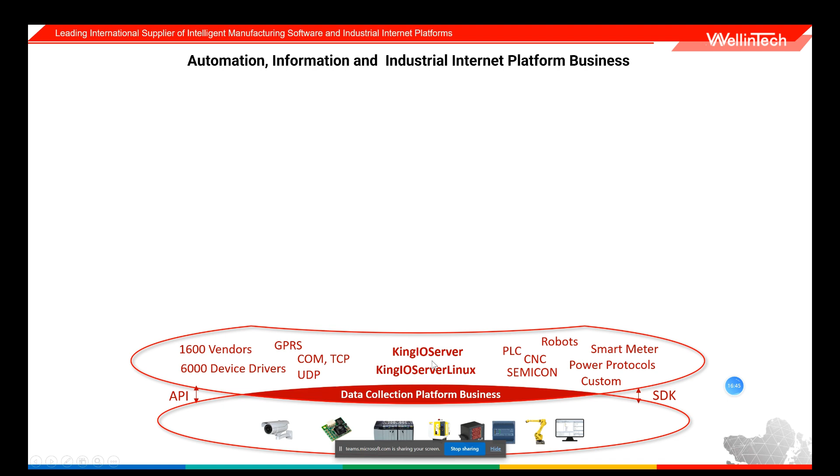In terms of vendors, we support famous names such as Siemens, ABB, Rockwell, and Kyland. In total, we have around 1,600 manufacturers supported by this platform, in order to build comprehensive data collection on the shop floor.

On the top floor, we have what we call the monitoring platform, where the SCADA and large historian databases reside. We have a number of platforms here, and the main one is KingSCADA, which will be today's focus. There's also King Historian, a huge database to tackle large amounts of big data—an industrial database, different from SQL Server and other databases.

Then we have King SPC for statistical process control, and King Super SCADA, which is more based on Linux, built for information security projects rather than traditional SCADA software. We also have KingView, which is basically a machine-level SCADA software like an HMI, if you need a low-cost SCADA solution.

So we have a number of monitoring systems designed to be market-specific, meeting growing market demands and technological complexity in terms of communications, protocols, and new vendors entering the market. We continuously adjust and improve these systems in terms of comprehensive data collection and features, so we can use this platform to build, for example, KingSCADA, especially once we have a comprehensive data collection system on the shop floor.

We can build equipment monitoring systems: centralized monitoring, plant level monitoring, remote monitoring. These are the monitoring systems that we can build using KingSCADA. Today's focus will be on this system.

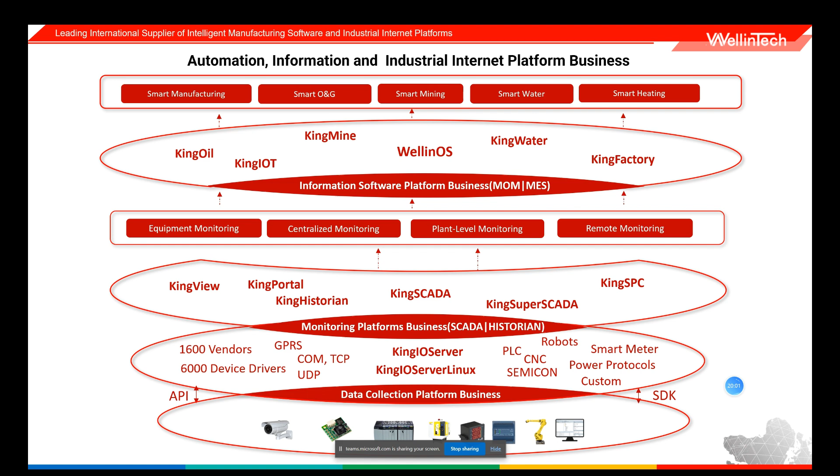If some of you here are maybe from Siemens, Schneider, or Rockwell, if you put them in parallel with these other vendors, the platforms we have, for example for data collection, most of them in Europe may be familiar with Kepware or Matrikon. These are now part of PTC, I think Kepware is part of PTC. Then on top, for example, iFix uses Kepware on the backend, but it's an OEM actually. GE's iFix doesn't have its own data collection system, they use the data collection system from Kepware PTC.

If you look at these systems in the core competitive advantage landscape, we have uniform, homogeneous systems here. For example, we have King IO Server, our own platform. We can easily integrate it with systems like KingSCADA, KingView, or King Historian. Here, basically, we have homogeneous interfaces, meaning from the shop floor to the top floor, we have our own systems that can integrate a whole enterprise using only Wellintech systems. Of course, it also has the capability to integrate with all these third-party systems.

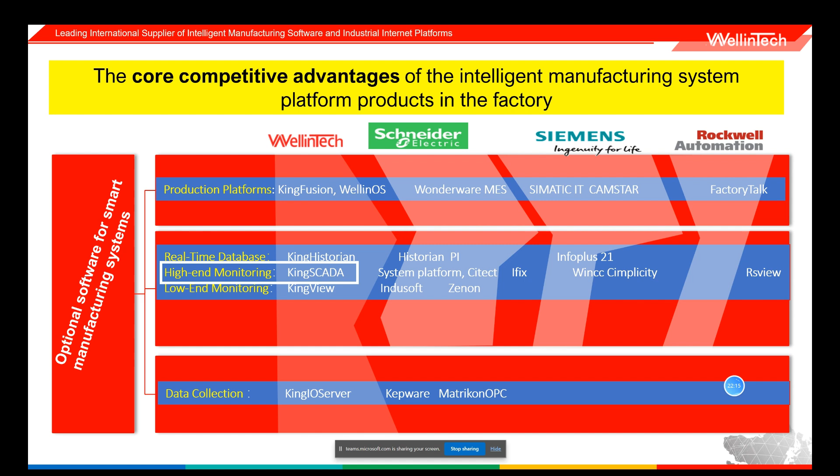The meaning here is that in any enterprise or factory, if you have vendors from one company, and that company can integrate all your systems from the shop floor to the enterprise level, it has a different advantage. But if you're going through a lot of systems, one vendor on the top floor, another one elsewhere, that means you need different kinds of skills and engineers. And if there are technical issues, you need to connect with all these companies for them to fix the issues. So there is a huge competitive advantage Wellintech offers in terms of integrating the whole factory, making a final product that is a digital factory or smart factory.

Moving on, today's focus is basically on KingSCADA, which is a SCADA system. This SCADA system is a Windows-based SCADA platform, it doesn't have any Linux version, and it can support installations mainly on the Windows platform, and it can also support virtual machines. If you have virtual machines, you may want to install it locally, or you can install it on the cloud. You can deploy virtual machines and install KingSCADA, and it will run normally, doing all the things we can do locally - we can also do it in the cloud. So this is a Windows system.

On the topic of KingSCADA, today I have 5 agenda items, and I will try to explain briefly the significance of the role that SCADA plays in the industrial automation landscape, and the top functions we have inside KingSCADA, along with some key features. I will explore this and show you a demo project. We will talk about system architecture, because that's a very important part of SCADA, then I'll explain briefly about licensing, and we'll have some questions.

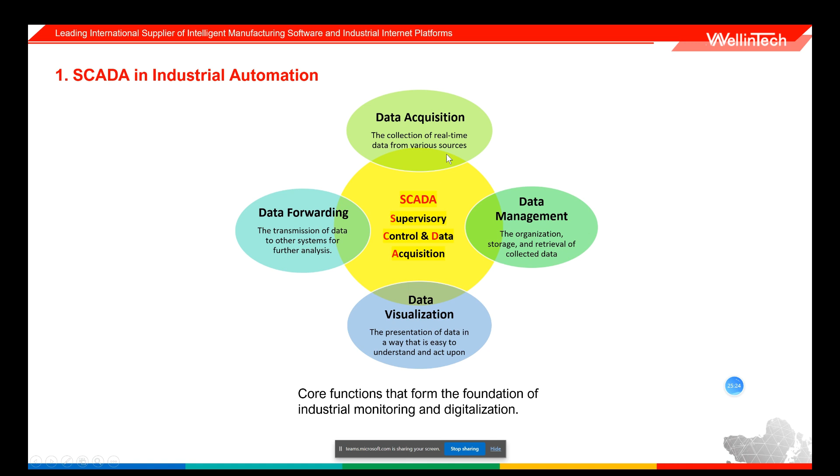Meaning you cannot extract any information maybe from an MES system, because this system must forward the data to other systems like MES systems or production systems. So essentially, SCADA plays 4 roles, and these are the core functions that form the foundation of industrial monitoring and digitalization in any industrial setting. SCADA stands for Supervisory Control and Data Acquisition, and it has these 4 roles essentially, in any factory.

And KingSCADA is one of the systems that can play all these roles in a very effective, very modern way. It's one of the high-end systems, and it's China's first general purpose SCADA configuration system. That means you can call it a SCADA system.

Configuration means it doesn't need a lot of programming. You can just drag and drop and develop the system - no need to write JavaScript or Java or anything like that. So it means you just need to know how to drag and drop and configure the functions.

So it's one of the high-end SCADA systems, and it's China's first SCADA system, because before 1995, inside the Chinese automation market, most of the automation market was dominated by companies like Wonderware, especially InTouch, or GE and similar systems. We launched a system called KingView. After KingView, there was another high-end SCADA, in order to compete in high-end markets such as water, wastewater, power, oil and gas, textile, heavy industries, and so on. So this is called high-end SCADA.

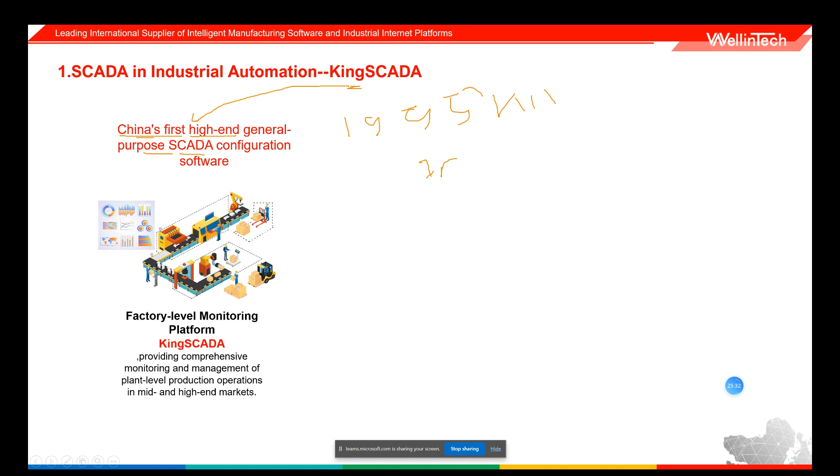We also have something called low-end SCADA, meaning it's targeted for the low-end market, versus this which is for high-end markets such as power and water, wastewater, etc. So we call it factory level monitoring - meaning if you have a factory, you can deploy it there and it can monitor the whole factory. It has this ability because a factory can have a lot of multiple devices, maybe 5,000 devices, or I'm not sure how many, maybe 1,000 devices.

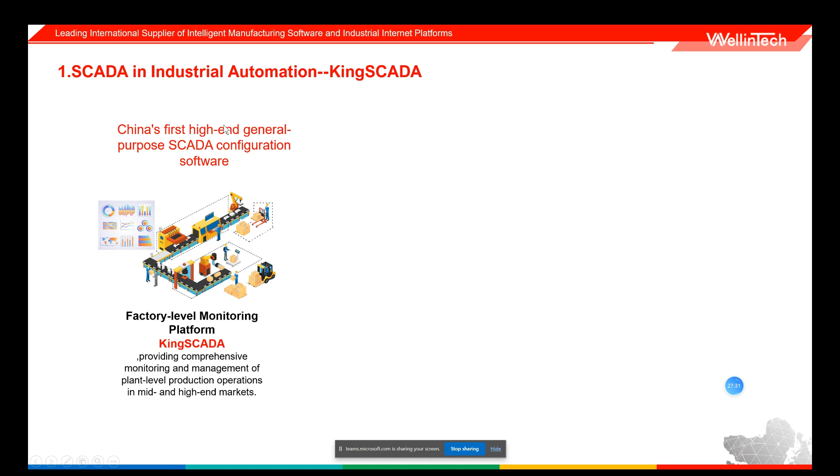And with many systems in the market, if they connect all those communicating devices, it can have stability issues, or it can crash after some time running, maybe 1 month or 2 months later. So that doesn't happen with KingSCADA - that's the reason we call it a high-end system.

If you look at KingSCADA in terms of the roles it plays, for data acquisition we have a huge number of communication drivers. If you're familiar with some IT concepts such as TCP, UDP, and platform level or application level communications - we have a huge number of communication drivers inside KingSCADA, which can connect to any devices in the market, whether Chinese made or overseas.

So we support a lot of communications for data acquisition. For data management, there are a lot of databases in the market in terms of SQL now, and there are coming NoSQL databases, etc. So KingSCADA can store and retrieve the data from these, maybe PostgreSQL, Oracle systems, Redis, even MySQL. These are very common databases that we have in the market, also including our historian, that is time series industrial database. So we can store the data into the system, and other systems can retrieve the data from this database. And if another system has the data already present, KingSCADA can retrieve it inside KingSCADA, and you can make some visualization, etc.

In terms of HMI and data visualization, we have huge ability, like features such as symbol factory and this kind of image extension, I mean the format of the images. So KingSCADA has an inbuilt graphics library, and if you don't like the graphics library, you can also build your own graphics and make your own graphics library. We will talk about this in a moment.

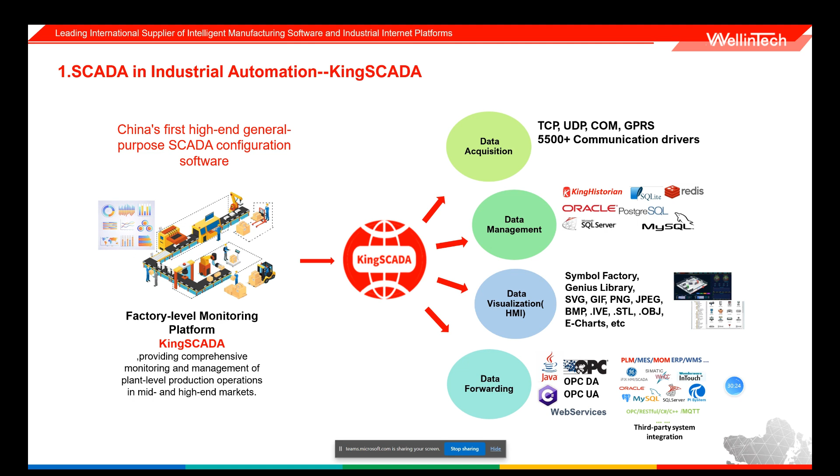And it has been widely used in many industries, and we usually categorize industries into four major categories. Municipal, we have multiple sub-categories: energy, heavy industry, and light industry. And it has been used in almost, this number is from our CRM, more or less 71,000 plus projects worldwide, and it has been widely accepted in the overseas and the Chinese automation market.

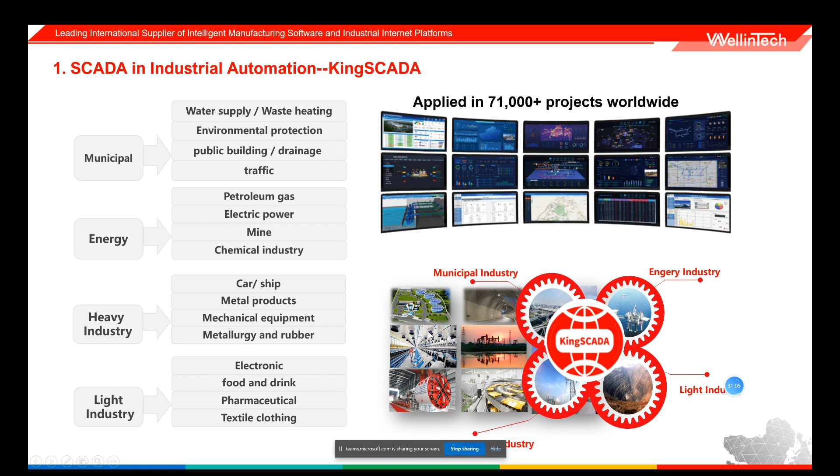Pictures and graphics: any SCADA system should have visualization capability. As I mentioned, one of its roles is powerful visualization, and KingSCADA offers that feature. It should also have an alarm engine, meaning anything in the factory with an anomaly should give a status or automatically highlight that something is wrong. So KingSCADA has a built-in powerful alarm and event engine.

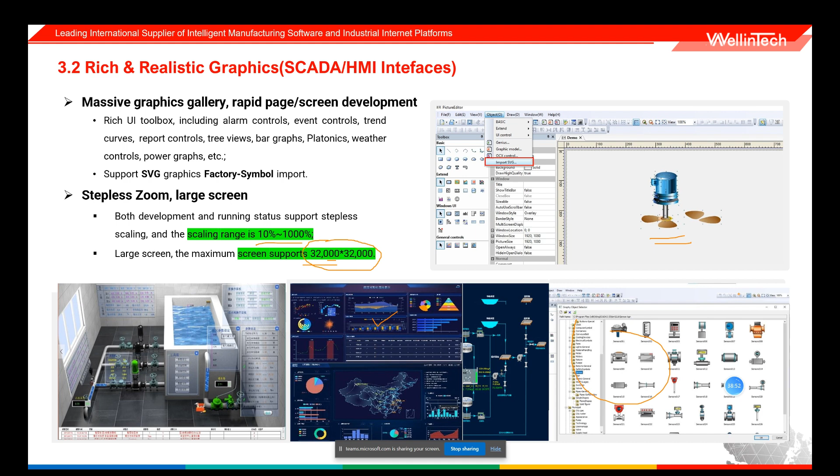And the third very important feature is something called model-based development, or in other words, efficient engineering. For example, let's say you are from a water company or a power company, and you want to build a model of, let's say, an IED. Maybe you need to configure 16 or 20 or 50 real devices. So it would be really time consuming to develop this digital model.

So KingSCADA offers a way. Basically, we can build one model and instantiate it, and these are called model objects. So we have a model and the model object, which is an instance of this model. This reduces development time, because you configure once and reuse the models.

That means if you change something here, or in the model, it will be propagated to all these models. So it's a very efficient way to develop a SCADA project. Development time can be significantly reduced with this model-based technique.

For example, if you're talking about Wonderware systems or other old SCADA systems, they don't have this technique. They traditionally have to do it manually, but KingSCADA offers a way to reduce the time through model-based engineering. So we have three kinds of models.

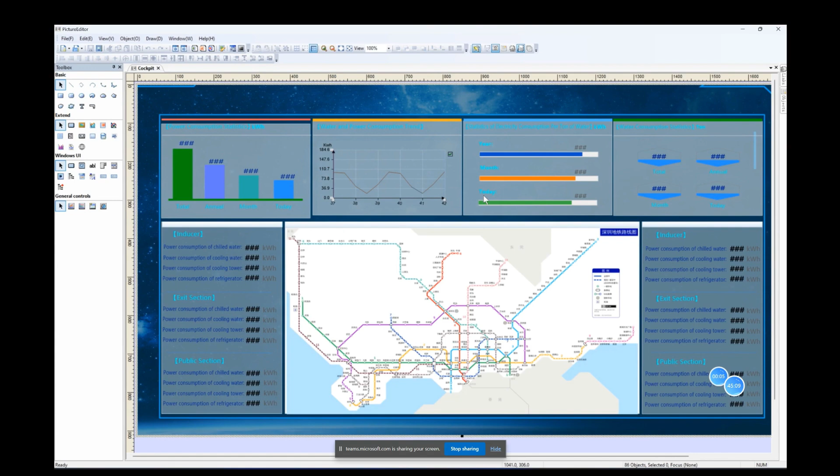Let's play a demo. So this is how KingSCADA looks. I think the video is around 2-3 minutes. So that's the runtime system, and this is just a demo project which will show some of the features or functions. It's a functional demo.

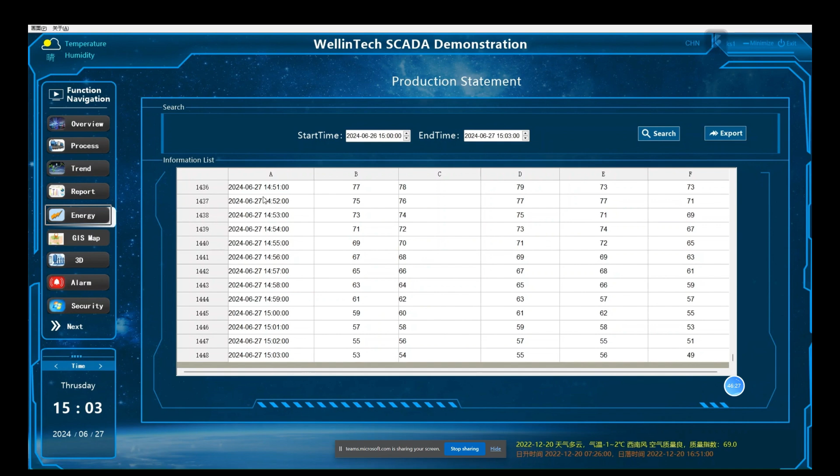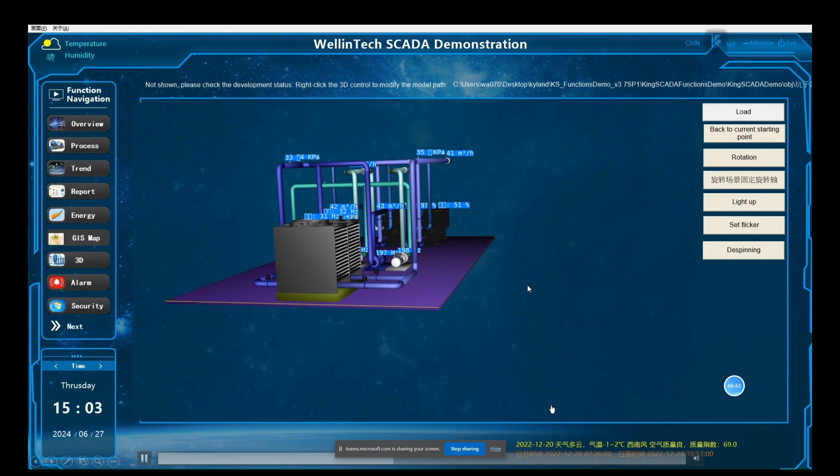No, I am just showing this video. Okay, okay, okay. If there is any problem with the communication, maybe we can just...

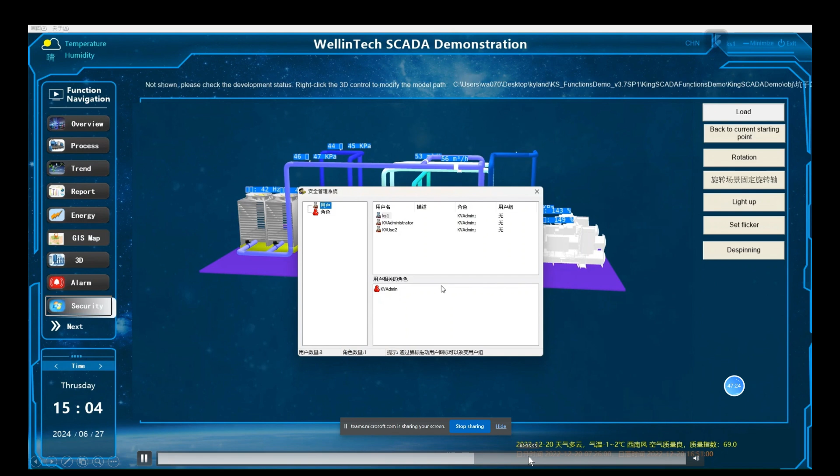So finally, it's a video. Of course it's a demo video, but we can connect to IP cameras too. And e-charts, for example HTML-based charts, you can import those and build this. So this is just a functional demo that I wanted to make interesting. We can build any kind of application. It's just a demo I'm talking about showing the features.

So this is the development environment, where we can make screens like this and devices, and configure the system. Then for running, we can just click on runtime, and this will be deployed in the factory, so it will be running there.

Moving on, I would like to talk about a very important feature of KingSCADA, which is any SCADA, including KingSCADA, is system architecture. When you are talking about real projects, maybe government projects and tender projects, they have different architectures. They want the system deployed in many ways. So it is important to understand the system architecture, how it works. KingSCADA offers a very flexible network architecture, or system architecture.

Starting with how KingSCADA collects data from devices - this is what we call the data acquisition structure of KingSCADA. KingSCADA has two components when you install it: KingSCADA and KingIO Server. KingIO Server is responsible for collecting real-time data from these devices, it can be any device. It's a huge communication driver, so through this you can select the driver and communicate.